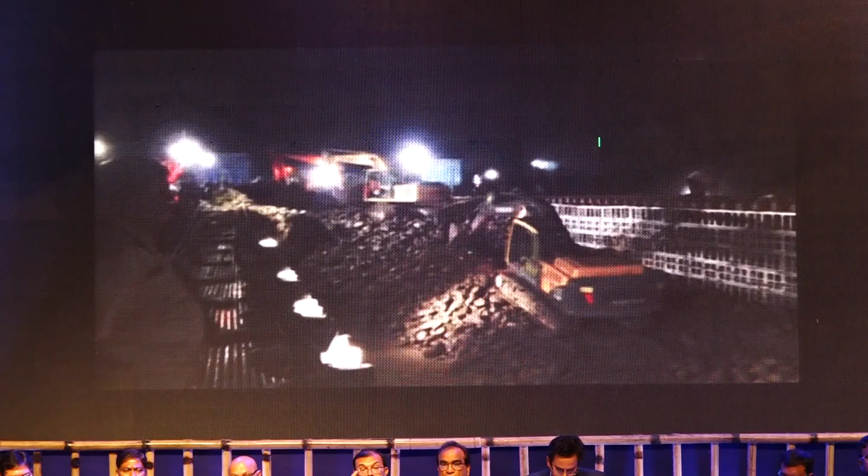Restoration of the 50-meter washed out approaches on bridge number 133 was the biggest challenge. Work was started from 16th August round the clock by filling of boulders to prepare the base. General Manager NFR visited the site and it was decided that for early restoration, CC crib shall be used over the prepared boulder base to support the track.

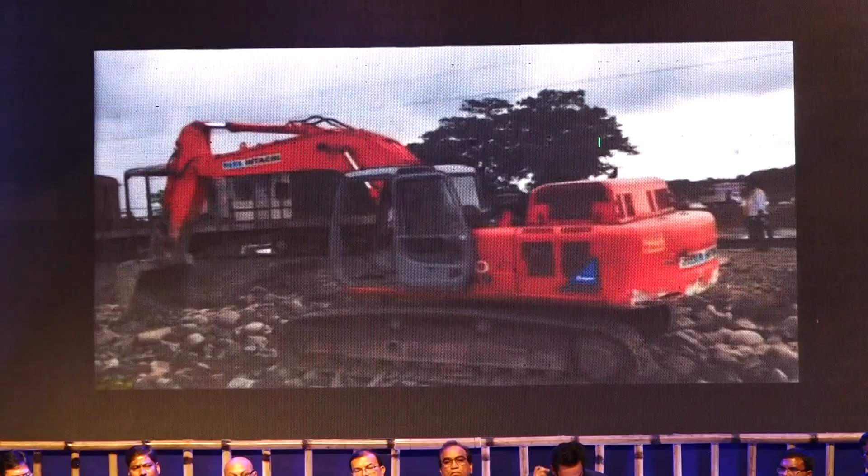It was due to the toil and sweat of hundreds of dedicated laborers, railwaymen, and the meticulous planning of railway engineers that such a feat could be achieved. Thank you very much. One important lesson which could be drawn from this is that when we are making bridges on new lines, we have to be very liberal as far as the waterway is concerned and not be stingy as far as providing additional bridges and so on.

So the next presentation will be re-girdering of road under bridge number 38 at Allahabad on NC Railway by Shri Rajiv Ranjan Kumar. Good afternoon, sir. I am going to present the methods, planning and execution activity of the re-girdering of road under bridge number 38 that is situated at Allahabad East End on the Howrah New Delhi Rajdhani route.

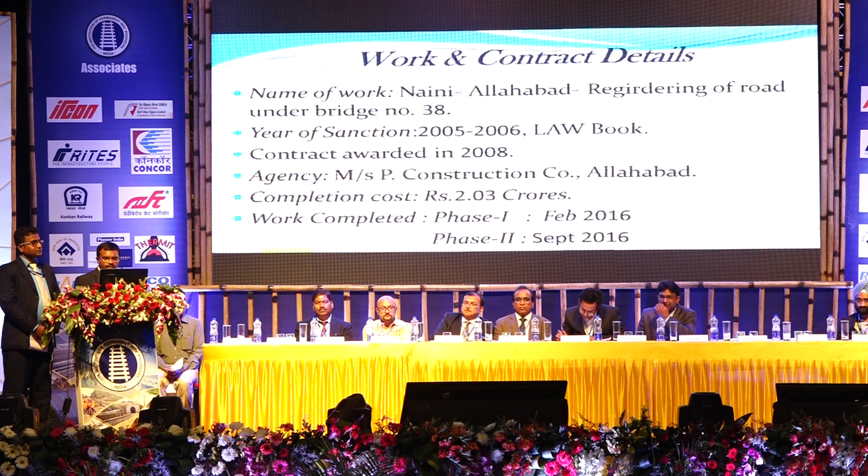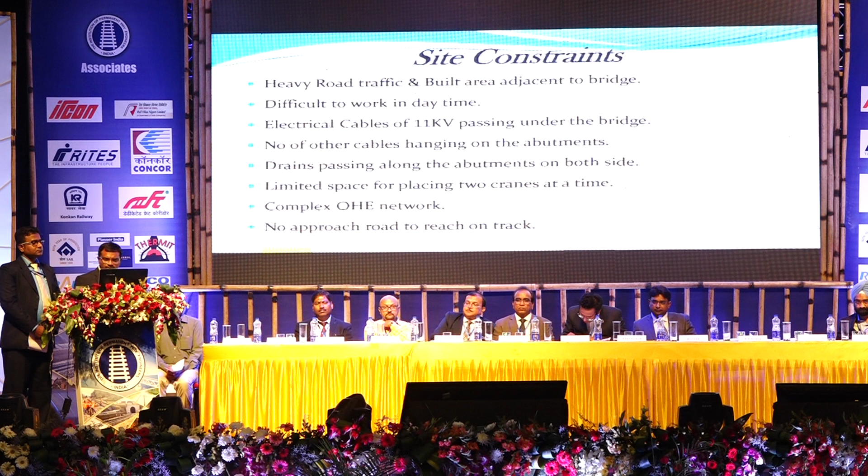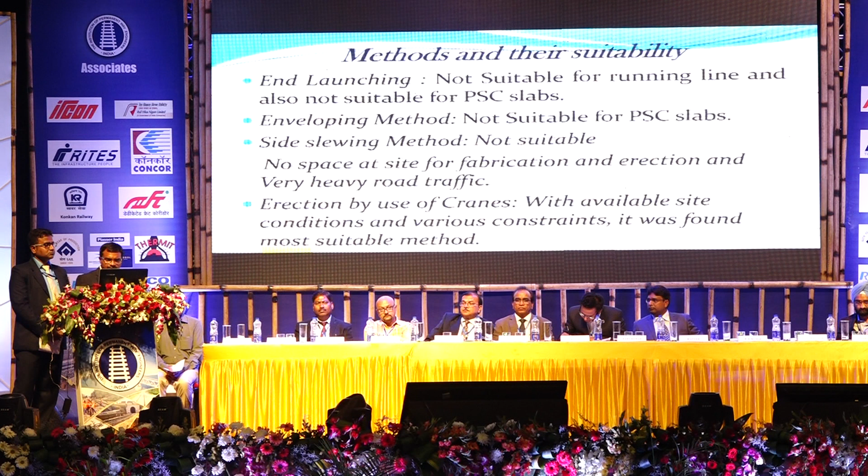These are the site constraints: heavy road traffic, built-up area adjacent to the bridge, number of cables passing through the bridges, limited space for working 2 cranes at a time. There is a complex OHE network on both sides. No approach road to reach the track. We have studied the various methods, but the most suitable method was to use 2 cranes of 200 capacity with available site conditions and different constraints.

This is the work planning. Initially, the work was planned with the replacement of steel girders with steel girders, but due to site constraints and built-up area around the bridge, it was decided to replace the old girders with PSC slabs by reducing the span with introduction of one central pier. The work was planned in two phases. In first phase, the work of Rambagh line, Prayag line and shunting line was taken. In second phase, girders of main line were taken.

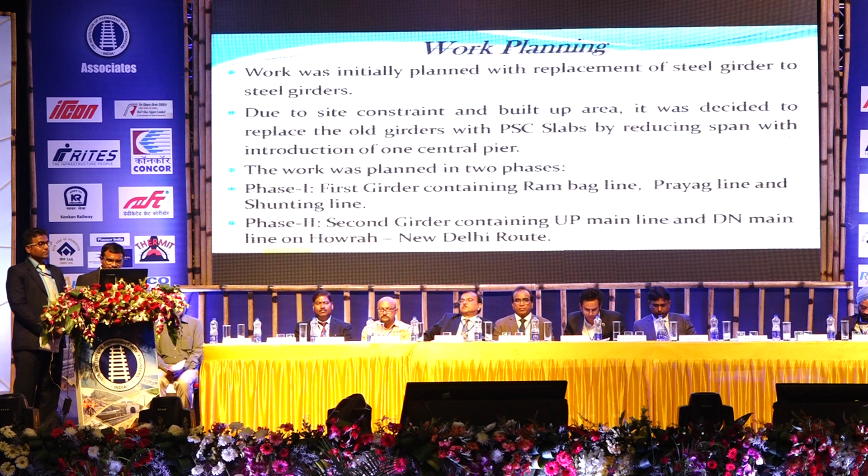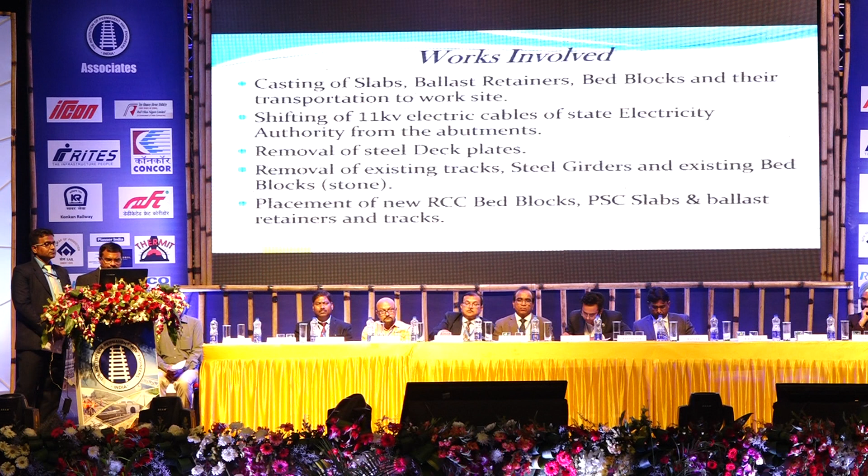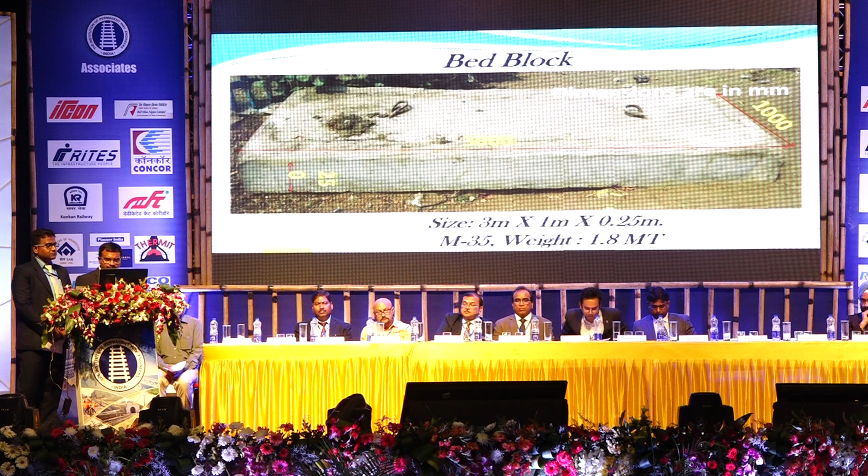These are the details of work involved for re-girdering: casting of slabs, ballast retainers, bed blocks, shifting of 11 kV electric cables of State Electricity Authority, which was a major hurdle there. This is the bed block we have provided there, weight 1.8 metric ton, M35 concrete block. This is the ballast retainer, weight 8 metric ton, M35. This is the PSC slab, M50, weight 16 metric ton.

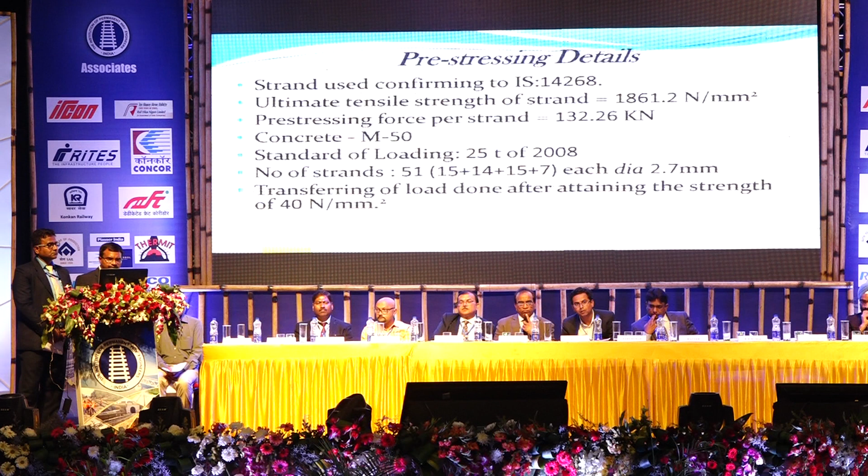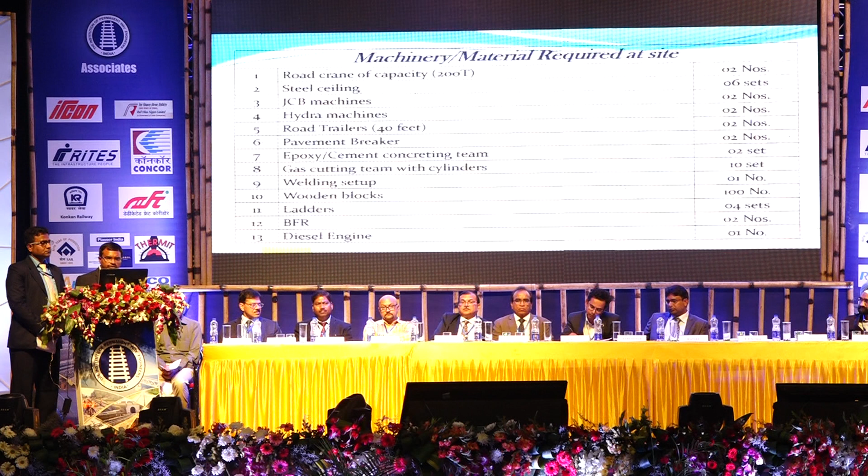This is the pre-stressing detail: concrete M50, number of strands 51, standard of loading 25 ton of 2008. This is the phase 1 block requirement. There were 3 lines. Block requirement was 320 minutes, 360 minutes and 430 minutes respectively for the 3 lines. This includes 210 minutes of OHE block. These are the details of material and machinery required at site.

Number of crane operations is very high. In the first phase itself, 52 crane operations were involved: girder removal, 3 crane operations; placement of new bed blocks, 12; placement of new PSC slabs, 27; placement of ballast retainers, 4; placement of tracks, 6.

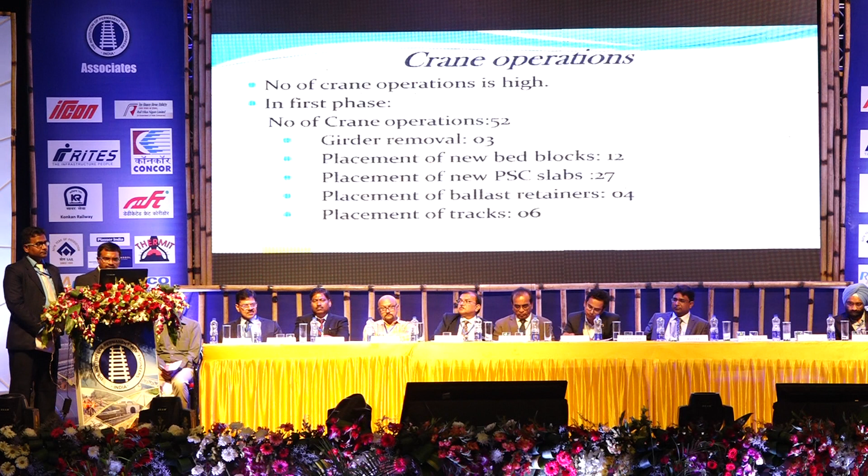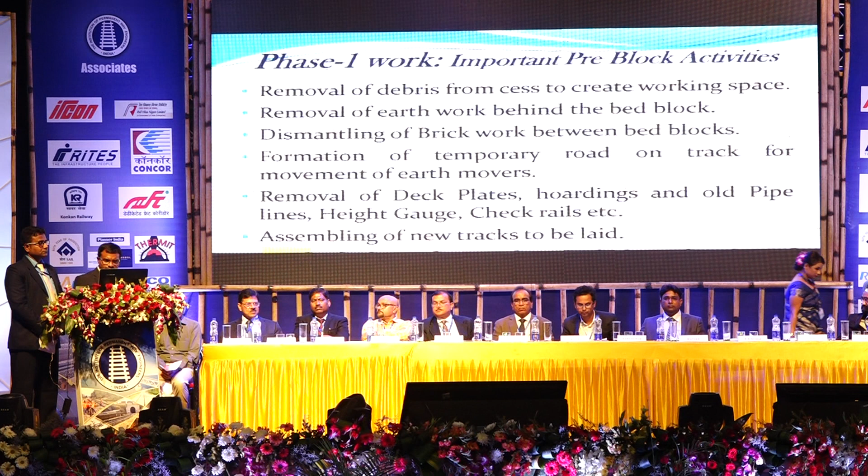This is the phase 1 work, pre-block activities. Some important pre-block activities have been initiated here: removal of debris from the cess to create working space, removal of earthwork behind the bed block, dismantling of brickwork, assembling of new tracks to be laid. This is the pathway prepared.

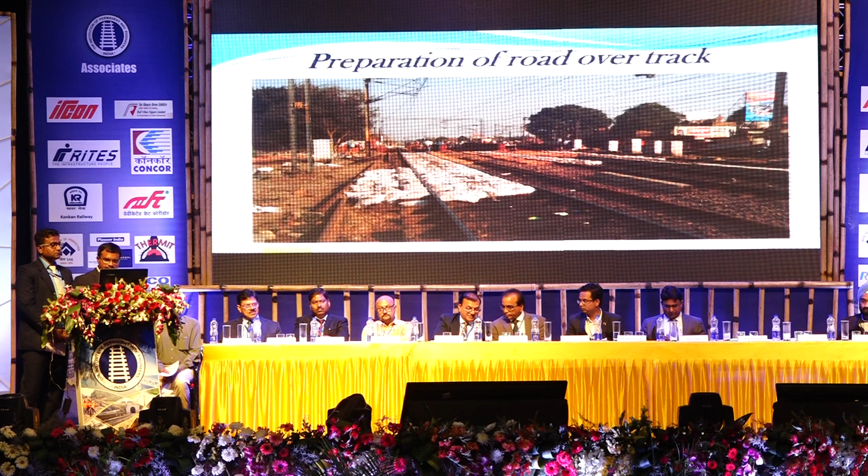This is the photograph of various activities: removal of earth behind the bed block to create a space for placement of bed blocks, brickwork removal between the bed blocks, preparation of road over tracks for placing JCB machines and Hydra machines to operate secondary works. This is the preparation for crane placement.

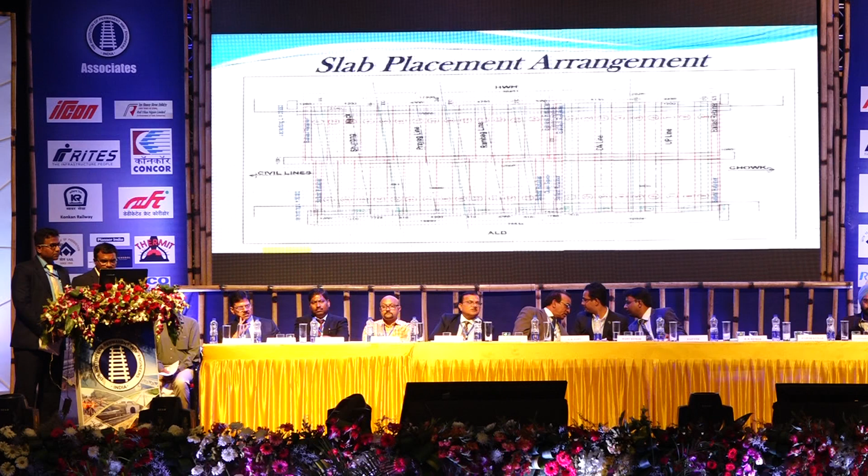This is a slab placement arrangement. These are total slabs. How these slabs could be placed there, it is clear from this view. This is the placement of road cranes. 2 cranes of 200 capacity were placed there. These are the block activities. Traffic block granted.

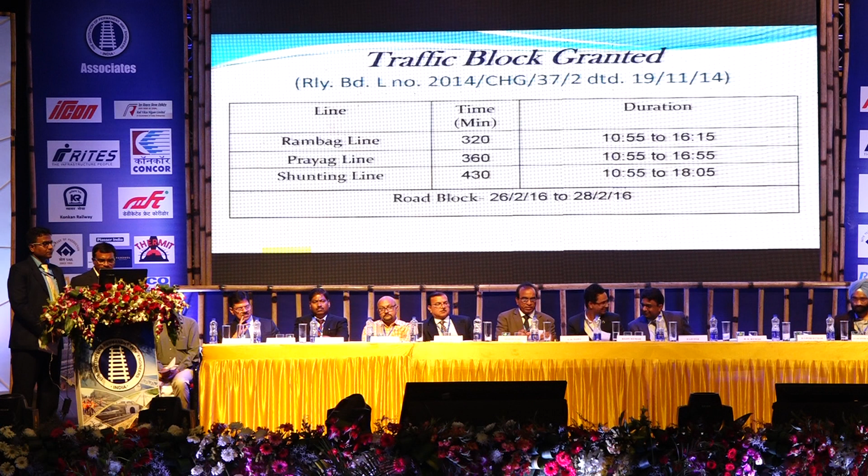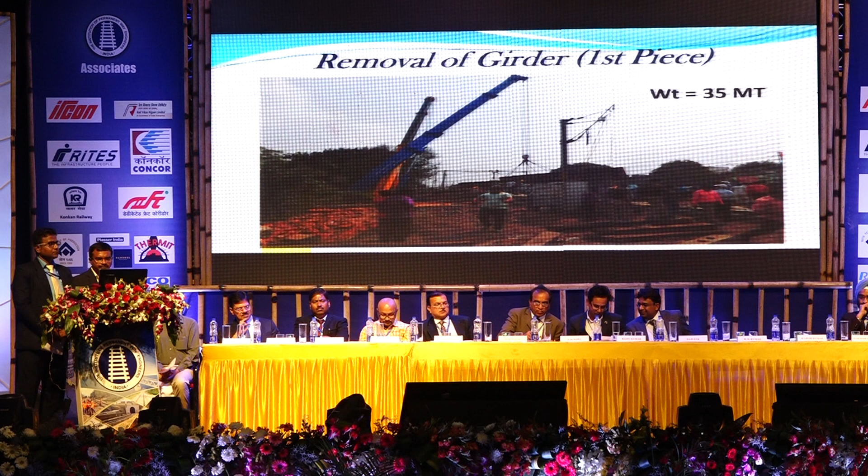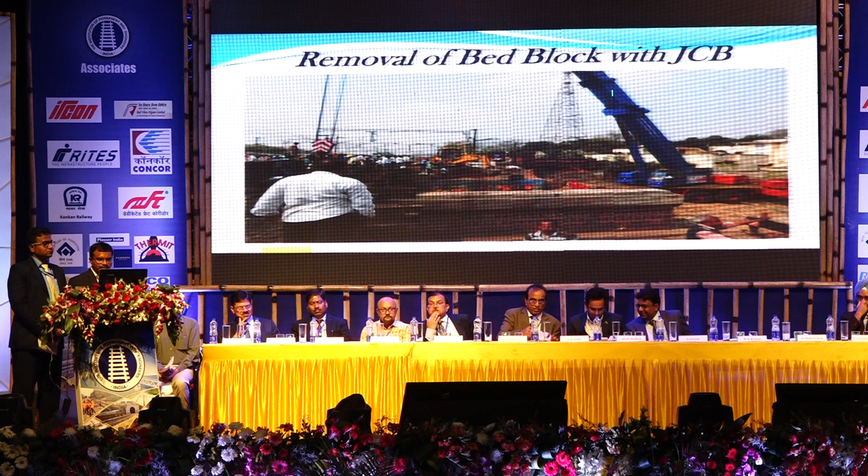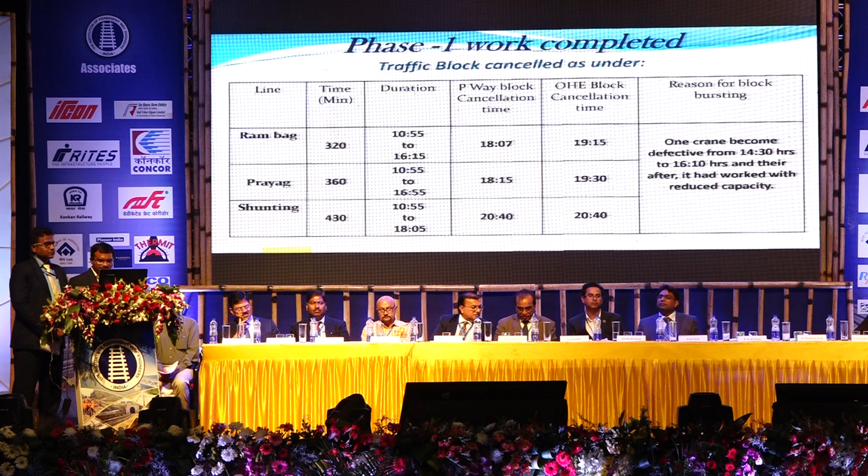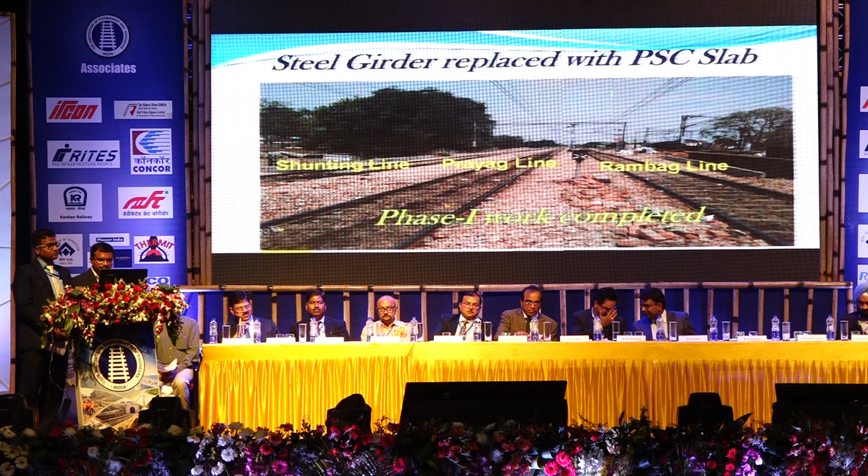Work completed. This is the photograph of completion of phase 1 work. Phase 1 work was completed. On the basis of experience of phase 1 work, phase 2 work was planned. On the same pattern, this work was also completed.

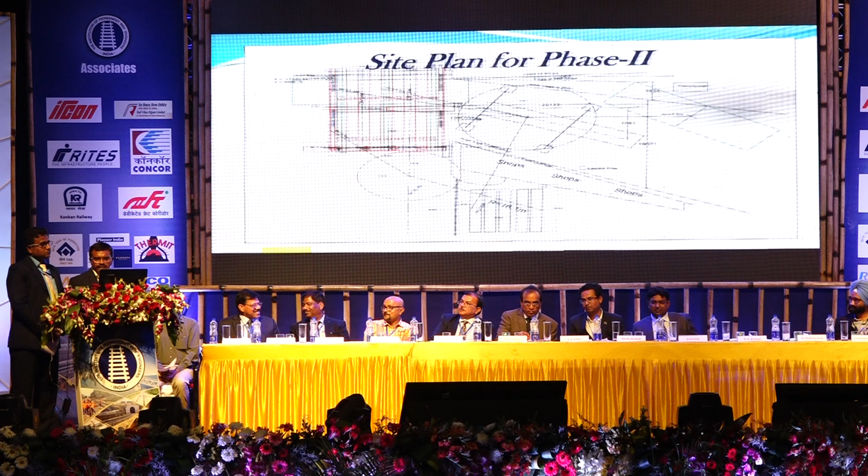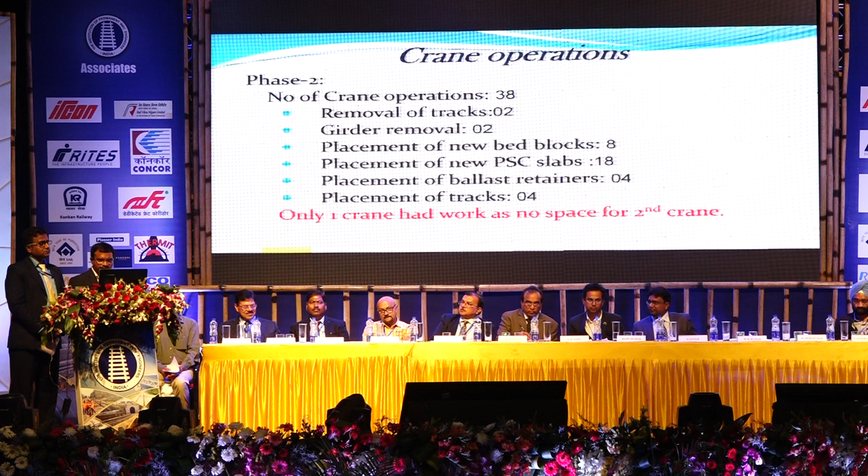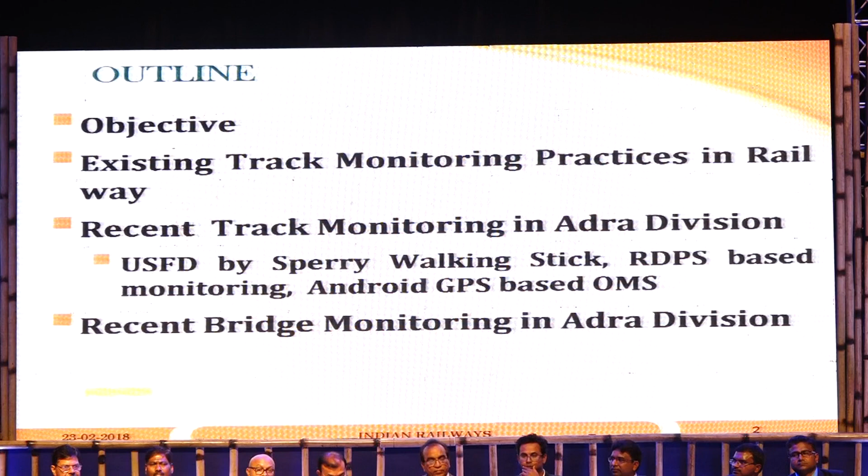Very good afternoon. This is a paper on leveraging developments in monitoring technology for optimizing track and bridge maintenance. It's been presented by myself and Mr. Saroj Kumar Biswal, SSE Planning. Sir, our basic outline is the objectives, the existing practices, the recent practices in our division, and basically the objective of using these modern technologies is to achieve the goals.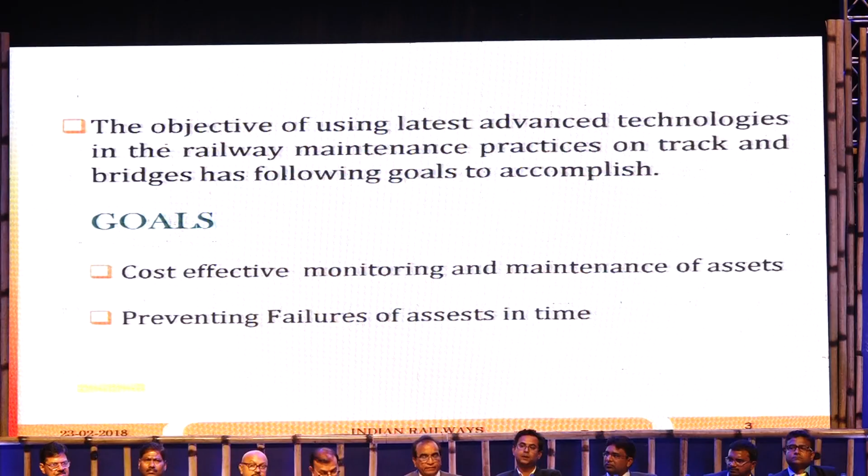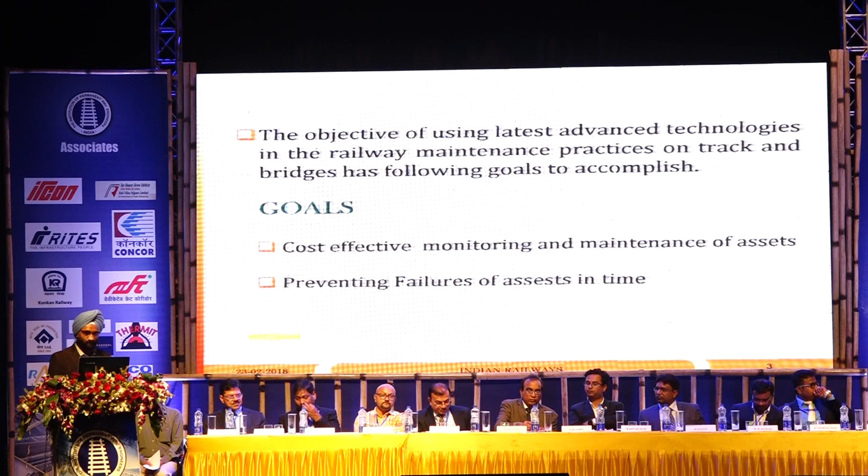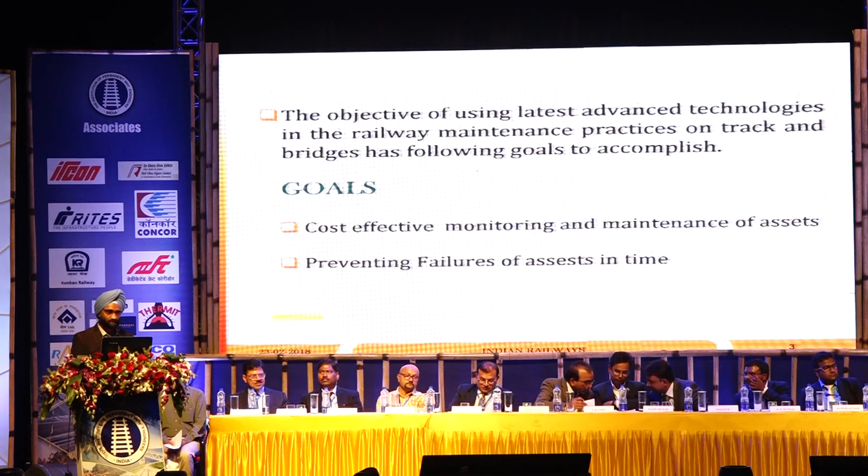What are the goals basically? Cost-effective monitoring and preventing failures of assets in time. It's high time that we go ahead, focus on modern technologies and try to remove our age-old traditional practices of monitoring and maintenance. Nowadays, very low cost but very effective technologies are available, and we can very well make use of these.

As far as the existing system is concerned, we have manual and mechanized monitoring. We have keymen, mates, inspectors and officers. They are doing various inspections on foot, push trolley, and in engine and rear vehicle. Thereafter we developed mechanized monitoring in the form of TRCs, OMS and oscillograph cars.

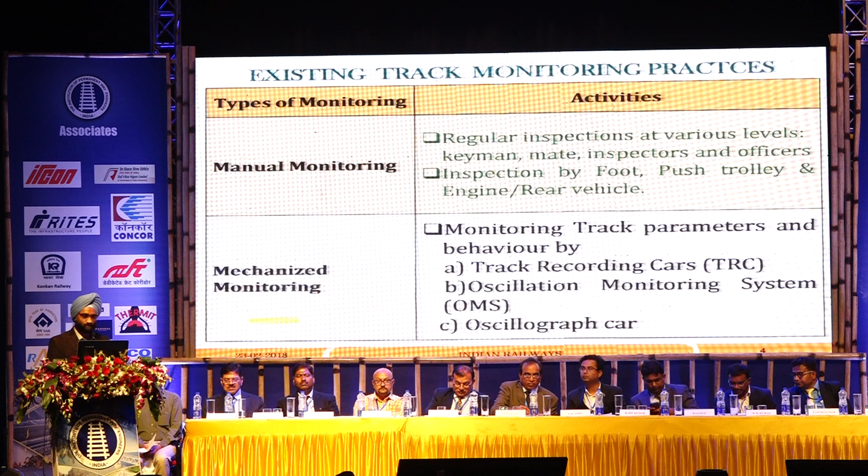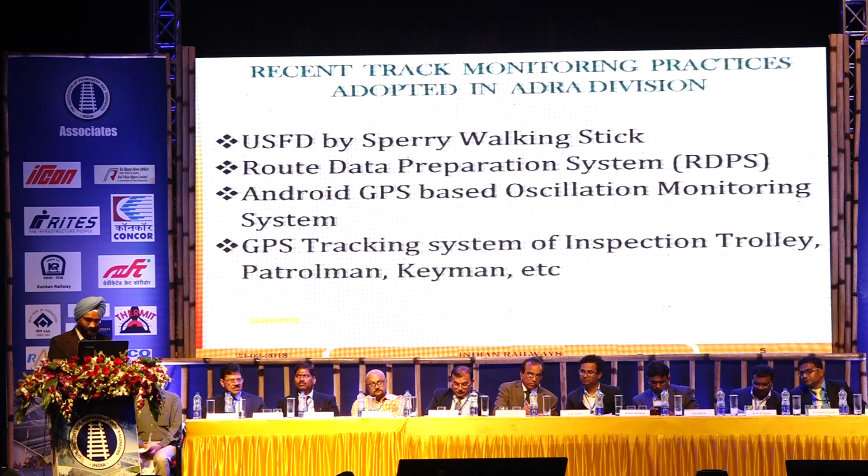Recently we have started using Sperry walking sticks for USFD. We have now gone on a large scale for the route data preparation system, that is RDPS. Then we moved to Android based GPS OMS, and recently we have gone for GPS tracking system for inspection trolleys, patrolmen, keymen and others.

This Sperry walking stick, about 25% as per Board instruction, we can outsource USFD by Sperry walking stick. It is much more effective as far as USFD testing is concerned because it has 9 probes in its RSU, Roller Search Unit, and it covers about 100% of the head, web and foot under the web, and can very well be installed in vehicles also at 75 kmph.

This route data preparation system is being done on a large scale on the Indian Railway. In our division also we have done about 40% of our track. And this is going to be the backbone for various technologies which are now coming up, like OMS, which is GPS based, and GPS trackers, because without this we will not be able to fully utilize those.

It can cover up to 100 track features. We send a person with a laptop and he clicks wherever the features are to be recorded, and all the coordinates of those features get recorded.